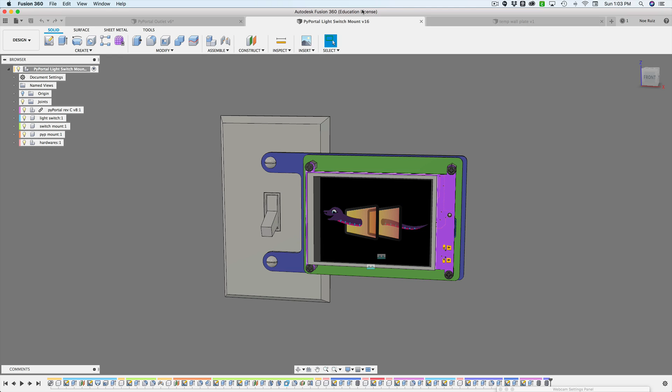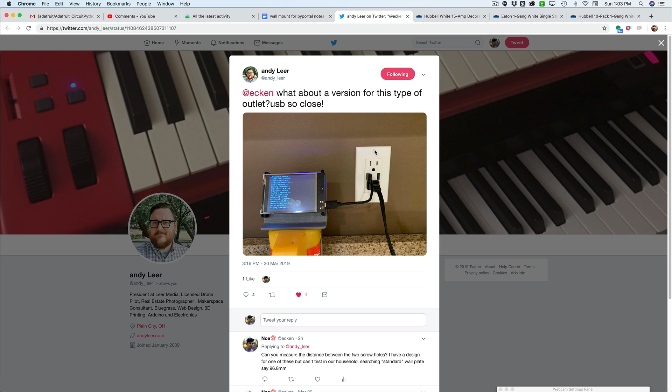In this tutorial, we're going to take a look at our PyPortal wall mount design and create a version that works with a wall outlet. So this is the light switch version, and I got a tweet from Andy Leer—thank you, sir, for sending this in. This is a great example of why we definitely want to make a design that can be either parametric or that fits this type of outlet. So let's take a look at how to do that.

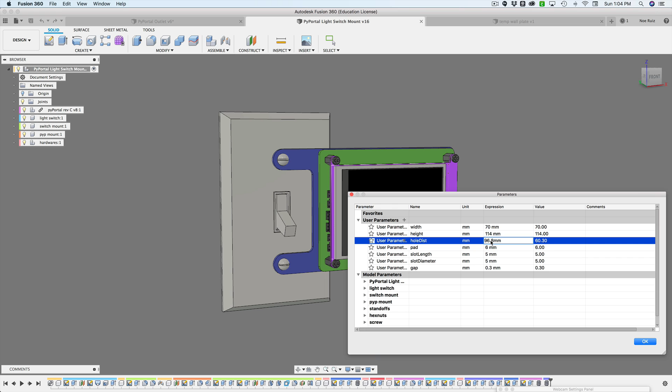Using the existing design that we have set up, ideally I really wish we could just update the dimensions, but let's take a look at what happens when we do that. I do have some user parameters set up, and I definitely recommend setting these up where they make sense. For this one, I have the hole distance here, set to 60.3 millimeters. So I did some digging on the internet and found out that most light switches, or rather outlets, have a distance of 96.8 millimeters.

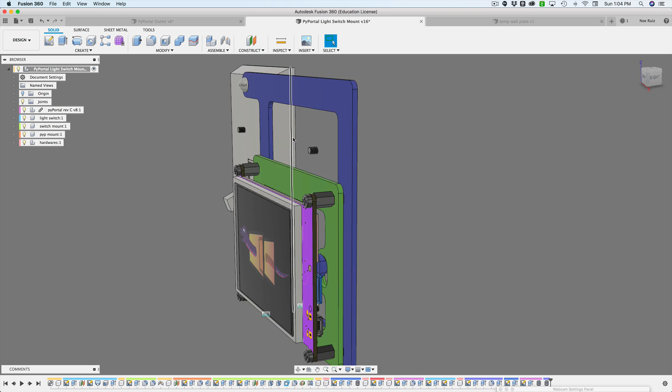So when I update that, the design will update, but we're going to run into a couple issues here. First of all, the joints that are set up for the PyPortal aren't really flowing with the design—they're not centered with the light switch anymore. You can see we have some broken geometry here in these screw threads and stuff. So we could go through each sketch and try to fix it up, but I already assessed the design and took a look at the main sketch that put this together, and there's no real good way to salvage or repurpose this design, so I'm just going to create a whole new design.

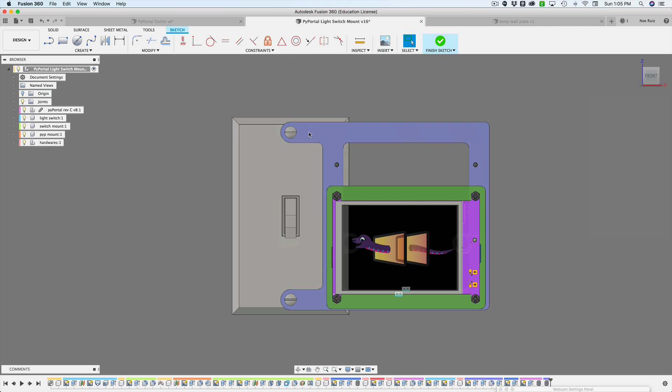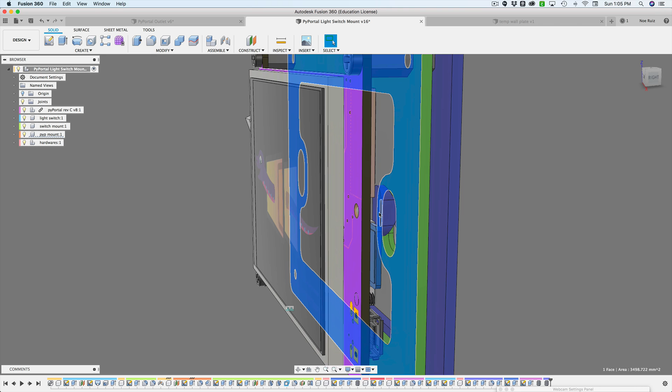But we can use a lot of the values and tolerances that we already have figured out here. For example, we already know a good set of numbers for creating these hooks, so we're actually going to make it so that our new wall plate can work with the PyPortal mount, because it's a two-part system where this guy hooks into these little pegs here. So that's what we'll do.

So let's go ahead and Control Z that, and that's the original design. We'll have this open as a reference point. I already have this created, so if we ever get lost, we can always go back to this one. But let's create a new one from scratch. So I have this empty design here, and I already have it saved.

What I'll do is start off creating a new component, and I'll name it the wall plate. I like to design where the front is the front of the thing and the top is the top of the thing, right? I really like to keep my design matched up with the view cube here. So I want to sketch on the front plane. I'll create a new sketch right up here, and I want this to be a centered base design. So I'll just create a rectangle here.

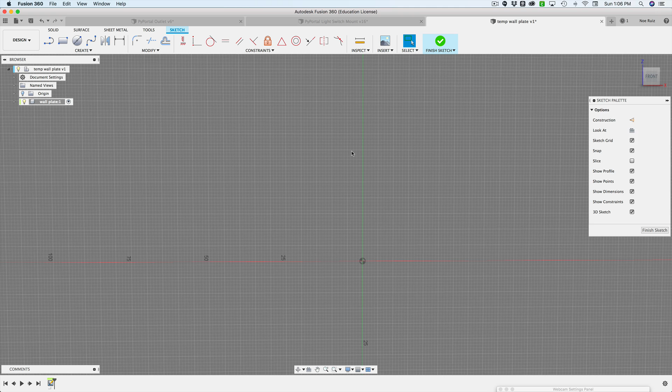I won't apply any dimensions to it yet—that way I have some degrees of freedom. What I like to do is grab this, let's say this is going to be our bottom edge, and then hold down Shift and select that center dot that's in the center of this origin, and click the midpoint constraint. That way I can move this around, and it'll always be in the center of our green line here. And then I can move this up here too if I need to.

With that, now I'm going to open up our parameters window and start setting up some user parameters. So I have plate height to do—I need a number here—and then I need a plate width.

I need to probably keep the same camel case. Let's say this is half of that, so like 54. And then I need a depth as well. Let's say plate depth.

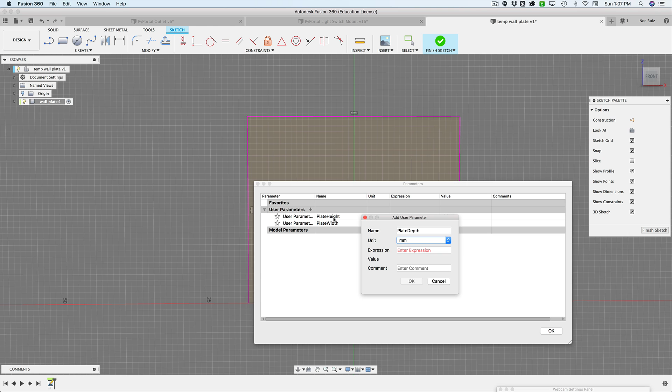Right, and then we'll say something like 4 millimeters. I'll hit OK, and I'll start applying them. So for this one, it's the height, right? Okay, and then for this one, it's going to be the width. Okay, and then the depth we'll do it a little bit later.

So now I do have some sort of reference here. Depending on whichever light fixture we have set up, we do want to take perfect measurements of that. If our spec sheet has it, we can just input those here. So for this particular light switch, we will use—or it's not a light switch, I keep calling it that—it's a wall plate. That's what they call it.

So let's use these numbers, right? So this is going to be in inches. So we can convert those over in Fusion, no problem. So for the width, oops, we got to do that in our parameter window. So for our width, let's just paste that, say inch, hit OK.

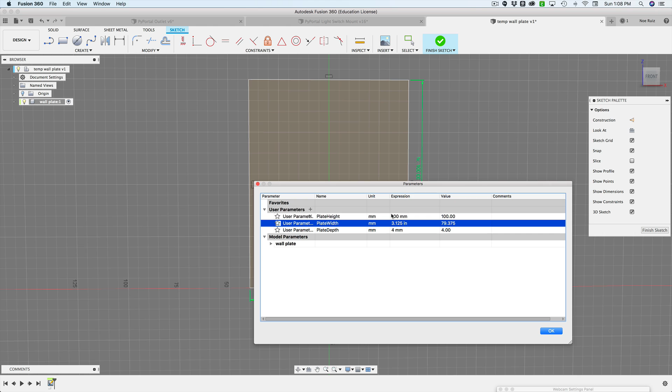And then for the height, it's going to be 4.875. So let's just put inch there, and it converts it into millimeters for us. And then the depth is 0.06, which is the depth here. Inch again, and there you go. It's like 1.5 mil. Wow, that's really thin. Okay, cool. So hit OK.

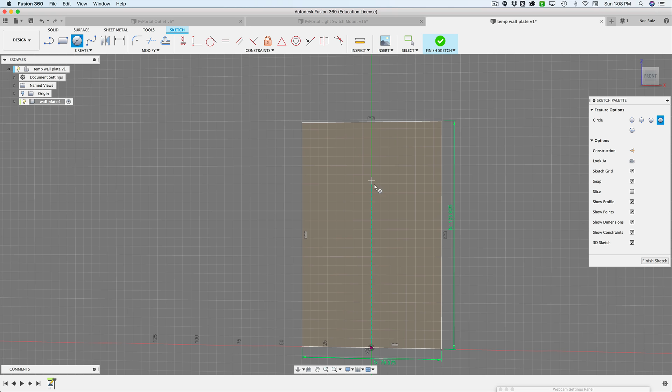So there is our setup light plate. Now we need to create those mounting holes. So over here, I need to kind of create a hole somewhere that's in the center of this. So what I'll do is, if I just roll over this right here, it kind of gives me an idea that it is in the center of that. So I'll just click one here.

It's going to be 6 millimeters, but I could also set up a parameter for that. Maybe I'll call it M hole for mounting hole, and then just type in 6 for that. And then we can go back into this and then say hole, and that'll be a hole.

Now, instead of creating 2 holes, I'm just going to mirror this one. So what I'll do is I'll grab my line tool and I'll create a construction line. If I just roll over here, it'll kind of snap to that middle there. I know it's the middle because it gives me that triangle. So I'll click on that and then get the triangle on the other side. And now I have a nice line that separates these two.

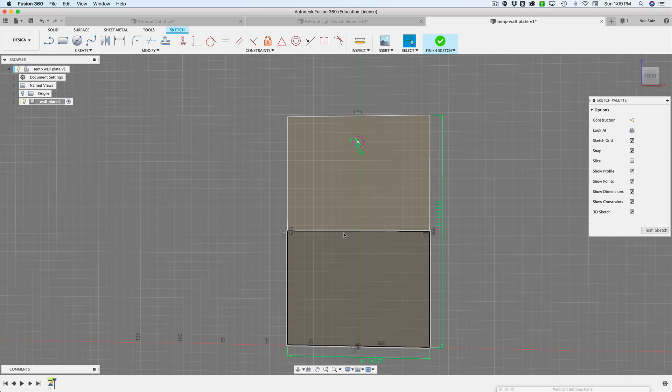It's always in the middle. And if I ever update the height of this, that will always follow and be in the middle. So I'll hit X on that to create a construction line, and now it won't intersect our profile.

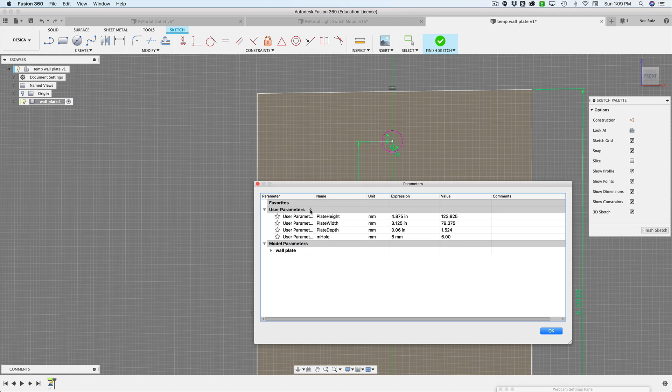And then what I'll do is I actually want to apply a dimension from this center of this hole to this edge here of the construction line. This one I need to put a number for now, so I'm just going to put 48. And what I'll do is I'll create a new parameter, and we're going to call this hole distance, hole dist, I guess, for that. And we need to know what the distance between those 2 holes are.

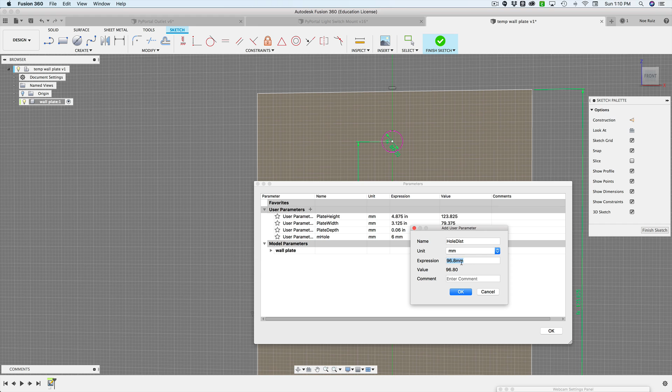I did some digging on the internet, and I did find something here. Actually, I don't believe I did, but I did write it down here, and this is the number that I found on Google Images. So this one is subject to change, of course, and if you put this millimeters to inch, it'll give you, it's like 3.81 inches. So we'll keep it that.

I'll say OK, OK. And then because we're using a mirror, I actually have to divide that by 2, which is super easy to do. So we'll say hole distance divided by 2, like that. And then it'll give me the half of that.

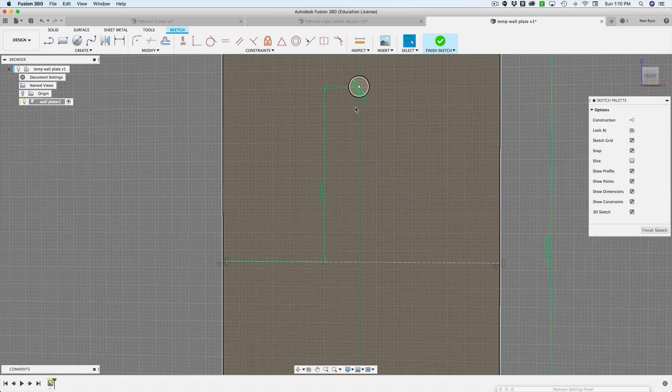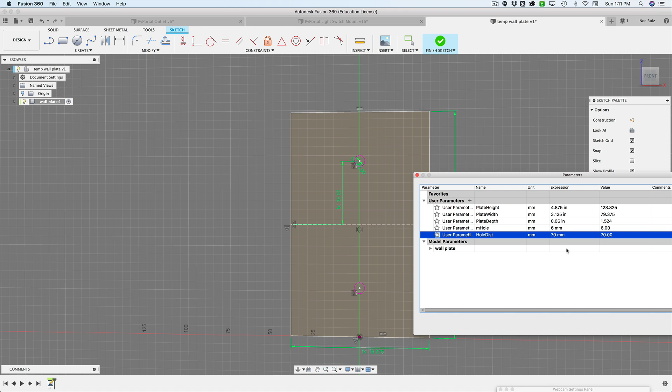So with that, now what we can do is we can create a mirror. So I'll say I want to create a mirror of that object that's already selected. My mirror line will be that construction line. And if we look down, there's a little preview of that before we hit OK. Cool. Now, so if ever our distance changes, our hole distance, the thing will update with us. So let's say we want to go down to like 70. You can see it's updating with us. Cool. And then I'll change it back to that.

Okay, cool, so now we have that. That's pretty much all the geometry we need to create this. Now there is one little issue here: if this moves this way, all of a sudden it's no longer in the center.

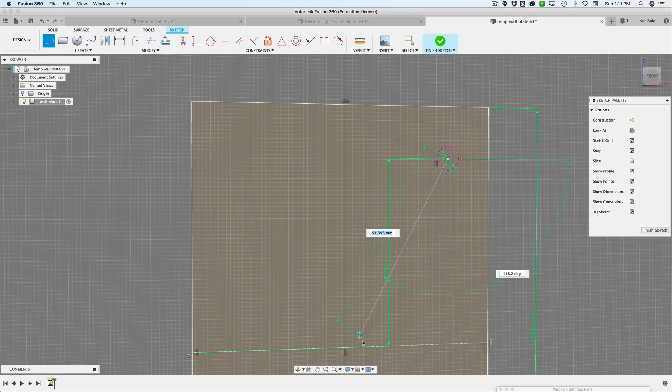So to fix that, what I can do is create another line. I want this line to be stuck to that center, and then put it in the middle of this construction line, like that. So all we have to do now is add a vertical constraint to this line, and it'll be perfectly straight up and down.

So let's do that by clicking on the horizontal/vertical button, and bam, you can see that purple color is now white, which lets me know it is locked and fully constrained, so nothing can move.

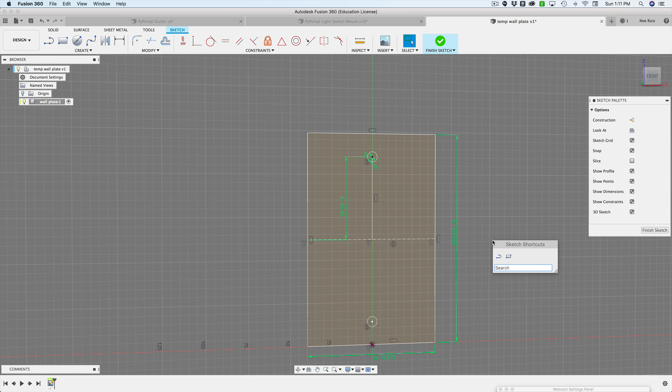Sweet, and again, if we were to update our hole dimension, the bottom will update with it. Finish sketch. Now we can extrude this out.

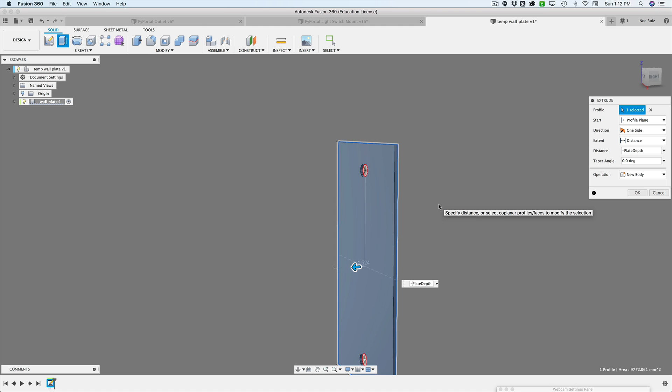Again, looking at it from the front view, I want to go this way, right? And that depth here, I can just type in depth. But you'll see that it's trying to go the other way, so I actually want to put negative depth, and that'll make it go that way, so it's facing forward. I'll hit OK.

So there is our light switch plate. I can go ahead and hide the sketch because I have that behavior turned off. Normally it turns off automatically, but I like to keep it on.

All right, so now that I have that, I actually want to bring in the PyPortal object that I have, the PCB itself. So I'll go into my parts folder and bring it in. Right-click, insert into current design.

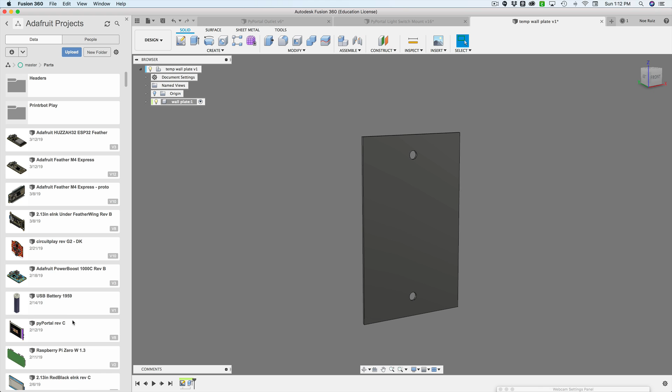If I had a bunch of different components, I would create a component and then bring it into that nested component. So for now, I'm going to just leave it as it is and hit OK.

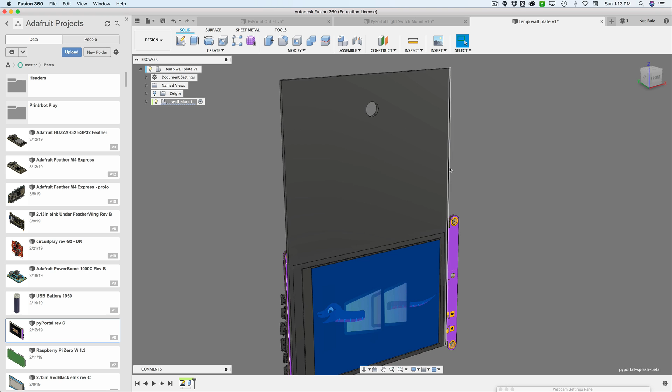At this point, what I need to do is create a joint so that it is always in the center of our light switch, because that's the way I want it to be. I always want this PCB to be in the center, or at least at the midpoint of this line here.

So let's see how we can do that with a joint. What I'll do is grab a joint tool like this, and my first component will be the edge of this guy here, and I want to make it so the little icon there is kind of flat, the way it is now.

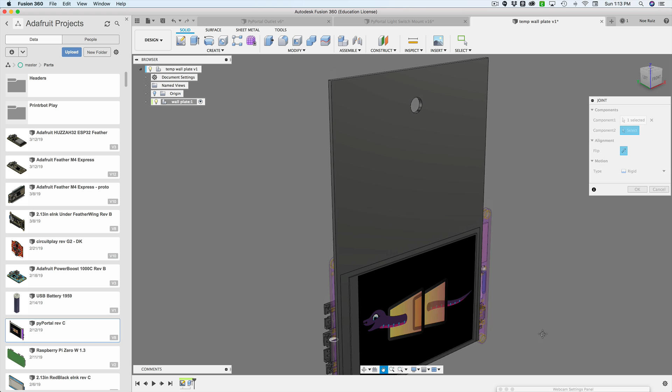So I'm going to click on that, and then scroll over this guy to get to that middle point, and you'll see that it's in the same orientation. I'll click on that, and Fusion will update and give me a kind of preview before.

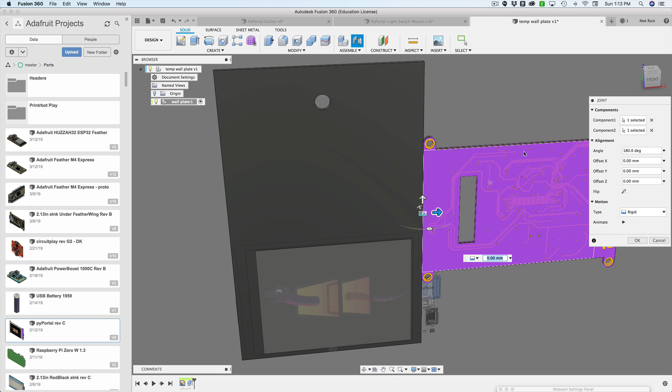Now all the components associated to the PCB haven't moved yet. Until I hit OK, it's just visually going to look like that. But at this point it is in the middle, and you can kind of create some offsets here.

So if I want this up away from the light switch plate a little bit, I can do that here, so I'm going to put -10. But for the X and the Z, I'm going to leave it alone. I'll hit OK, and when I hit OK, all those components get updated with it.

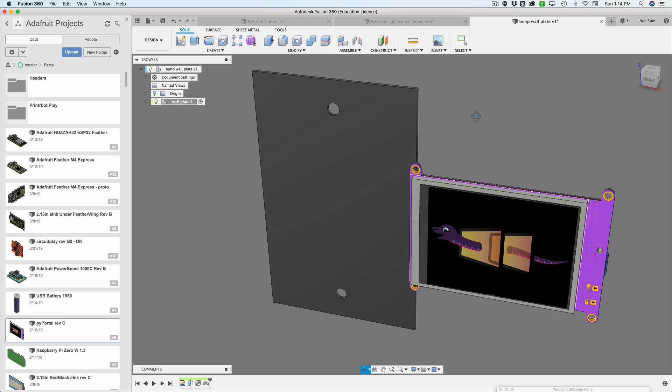And now it's floating in space there, but that's because we haven't created our mounting bracket yet. So we're going to create that next, but let's go ahead and actually test out our joint and our user parameters.

So bring up that user parameter window. Let's navigate away there, close this window, give us some more space. There we go, that's looking good.

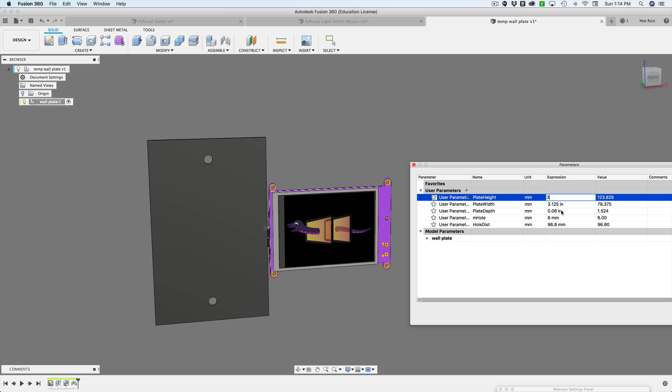So now the width, or the height really, let's play around with the height. It says 123, let's do 130 millimeters. Hit OK, and you'll see that the PyPortal is now still in the center, or still in the middle of our edge there. So that's working out really well.

So if we ever change this, we go higher, for example, that PyPortal is just going to always stay in the middle of those two mounting holes, which is what I want. Very cool.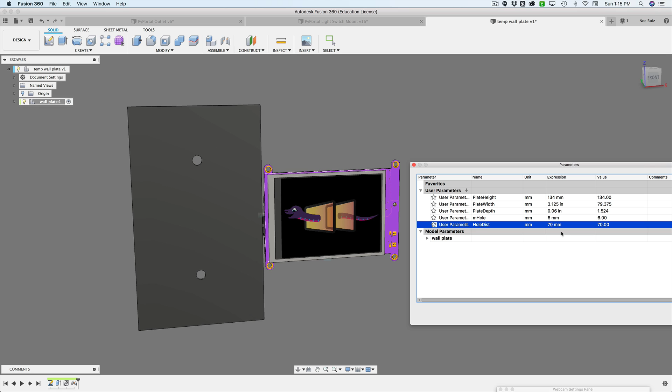You'll notice that the plate's changing, but the hole distances remain the same, which is good. That means if we change this, we want the PyPortal to stay in the middle because it's relative to the width of the plate height now. So that's the way we have it set up. We can change that back like that.

All right, cool, so it's working so far. Now we can create a new component and work around our thing here. So I'm going to go out here. It looks like I accidentally brought the component into the wall plate. That is not what I wanted to do.

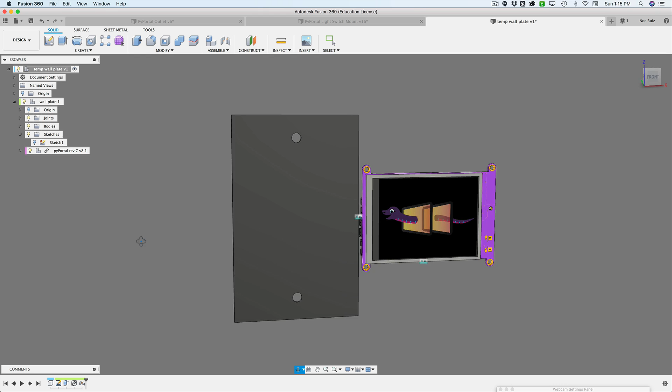Unfortunately, I can't undo that, I can't take it out. So I'm just going to leave it like that for now. That could introduce a problem, I suppose, but we'll leave it alone for now. I probably should have brought this outside in the main assembly instead of nesting it in the wall plate, because now I need to create a new component.

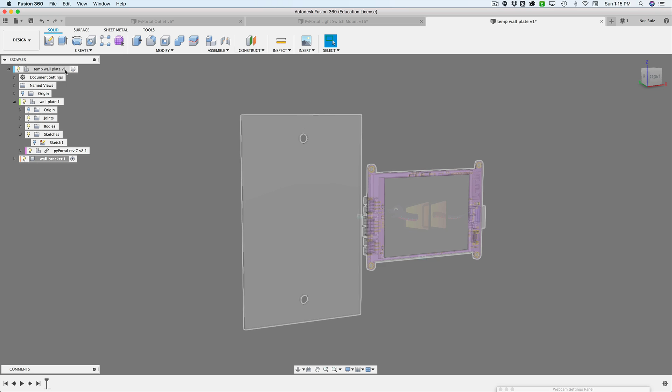So I'll create a new component. I'll call this one the wall bracket. That's what it is, and it's on the root level here. If I bring this down, you can see it's in the root level.

All right, good. So what I want to do is sketch right on top of this light switch plate. To do that, I'll select the surface and then hit the Create Sketch button.

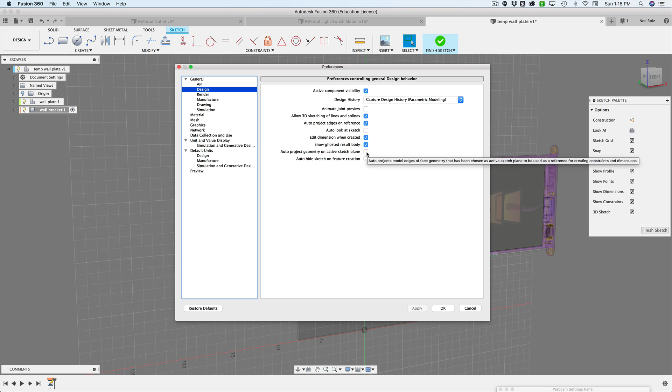On some machines, or some installations of Fusion, you might get a projection already here. But the way I have it set up in my user preferences, if you go up to your name, then Preferences, then down to Design, you'll see there's an Auto Project Geometry on Active Sketch Plane option. I have that turned off. If you have it turned on, you'll probably already have all those geometries projected in automatically.

I do not, however, because I don't like to do that a lot. I just want to bring in a couple things, like this mounting hole here. So I'll just hit the letter P, which is a hotkey for project.

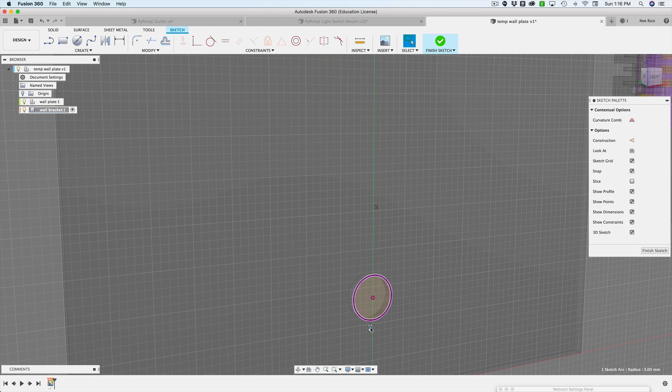I'll come up here and grab this one as well, so now it says I have two selected. I'll hit OK, and now I have them in there, and they're purple, indeed linked to the light switch because of that little icon, letting me know it's a projection. If I ever wanted to break the link, I could just delete that icon, but I'm going to leave it on there because I want it to always update. So if we were to change the hole distance, those would follow that, which is good.

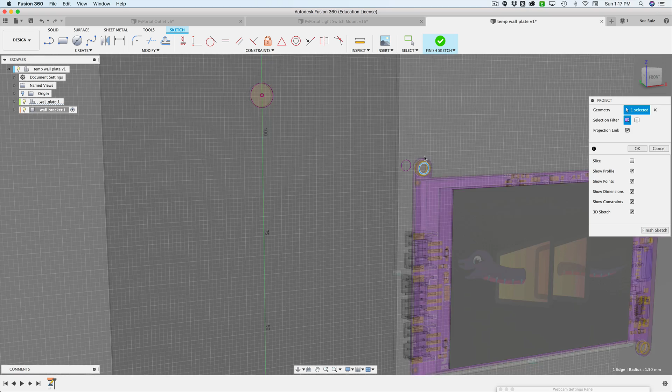The next thing I'm going to do is project in the mounting holes from the PyPortal itself, bringing in those four mounting holes like this. I'll use the hotkey P again to quickly bring up that projection dialog, then hit OK. You want to make sure the projection link is actually clicked on. You can have that turned off, and if you do, they will not be linked, meaning they won't update when something moves.

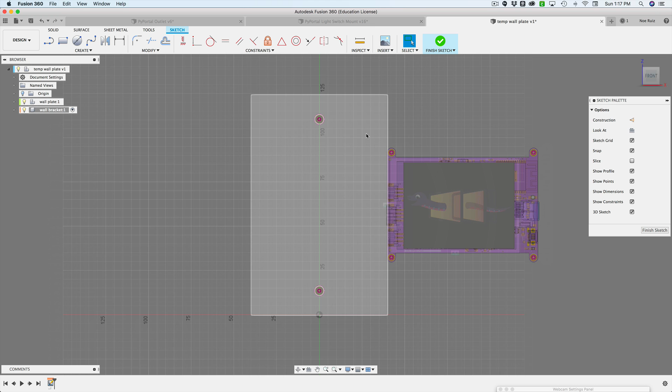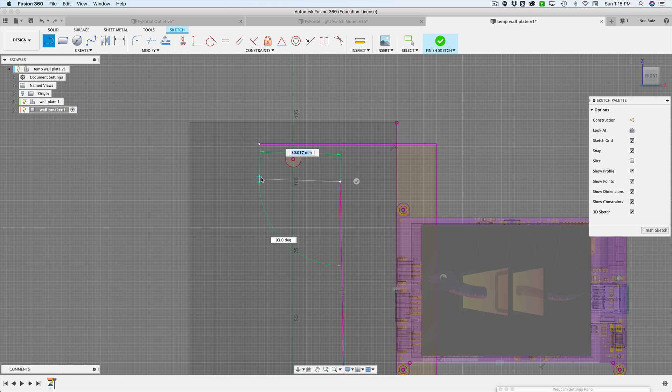So I'll hit OK, and now I need to start drawing out my geometry for the bracket. I'll start with the line tool, and I'm going to freehand this out, just clicking on the general idea of where I want this to go. I kind of want this to come out here, like this, coming over those mounting tabs. Click in here, kind of do this bunny ear situation. Then come up here, do here, and close it off right there, and that closes it.

Now, there are definitely some things we need to fix here.

Some of these edges are not straight. So for example, this one, I'll go ahead and straighten that out, and then straighten up any of the ones that are kind of, I'm not sure if they're straight or not. But that looks good.

The next thing I want to do is make these mounting tab bunny ears a distance away from the mounting hole here. I'll round these off to like 6, and do that for just about every edge that is close to that circle here. So as you can see as I'm drawing it, these 3 edges are 6 millimeters away from that mounting hole.

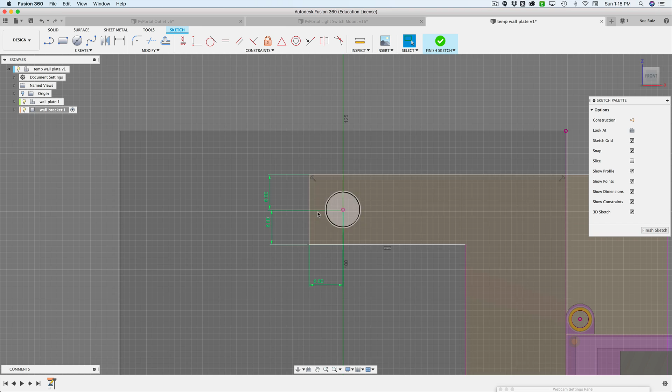I'm going to repeat the process for the bottom here as well, using our line distance tool. And if we wanted to, we could create a user parameter to set this up, but I plan to have the same distance around that mounting hole. So now I have 6 over there.

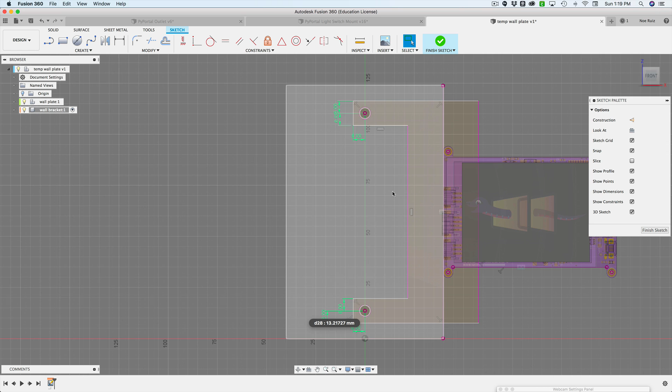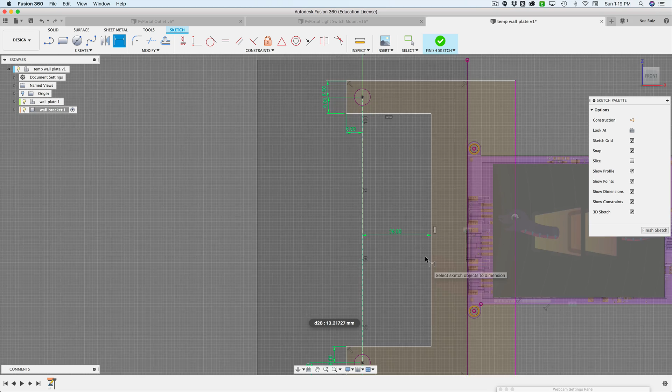The next thing I want to do is create some distance away from the center of this axis here, this line. So I need to create another construction line that will connect these 2 mounting holes together. I need to make that line into a construction line so that it won't intersect anything. Now I can apply a dimension for a distance between that and this center here. I believe I'll use something like 26. There we go, okay cool.

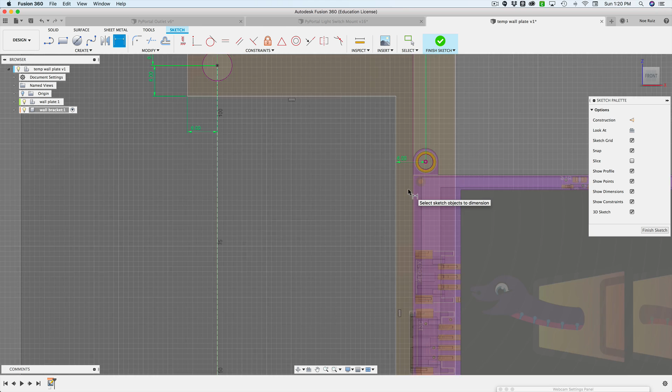So now with that, I want to create some distance from this area to this mounting tab on the PyPortal itself. I'll make it 6 as well. We could probably get this number here a little bit closer, so maybe I can delete that and say I want 6 millimeters away from here. I think that's better. There we go. That way it's always 6 millimeters away from any number of edges here.

So now I have this area here. I could probably delete this. Wait, yeah, I don't need it. So I deleted that auto-projected thing there, it was an edge I didn't need.

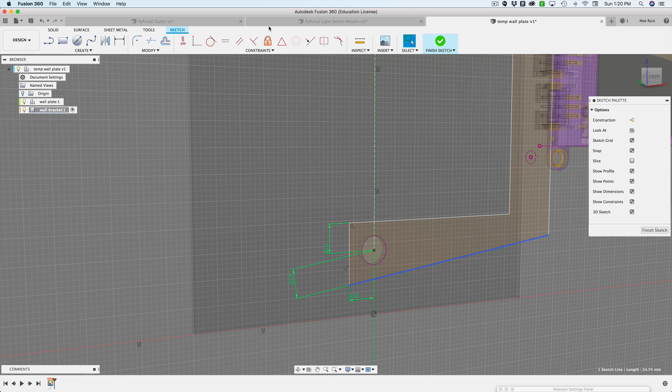What is this? What is this? Oh, I see, yeah, that needs a horizontal constraint there. Apply it like that, and that should lock in our shape. So that is kind of the shape.

Let's go ahead and do a little quick test with it while I'm in here editing the sketch. So if I change the hole distances, where is it here? Hole distance - if I change that number to a lower number, yeah, it updates with it. All that square geometry is updating with it.

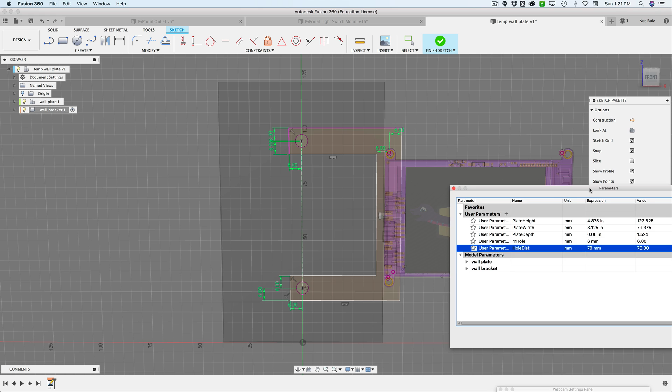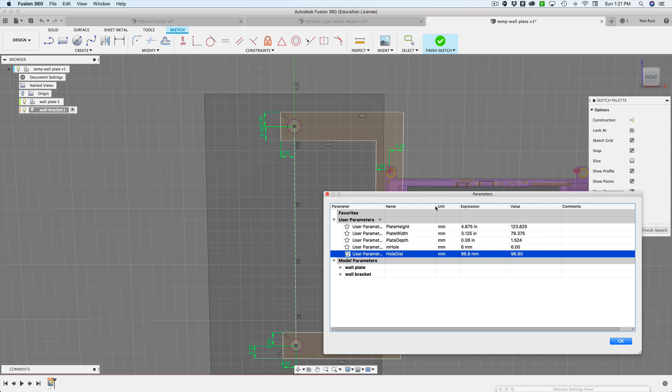There is a problem though, it looks like. This is still not, yeah, that needs a horizontal constraint. There it goes, now it's working better. I really recommend doing that, checking your work before actually extruding any of the profiles, that way we can catch something that would break later in our design. So I'll bring back that value to 96.8, and it looks like everything is still locked in place, which looks good. So there you go, that is working out.

So the next shape I need to create is something that's going to encompass the mounting tabs on the PyPortal. I'll grab my line tool again, and click around here, kind of freeform this, to create this shape. It's going to encompass the mounting tabs. Let's go ahead and straighten out our lines with some horizontal constraints.

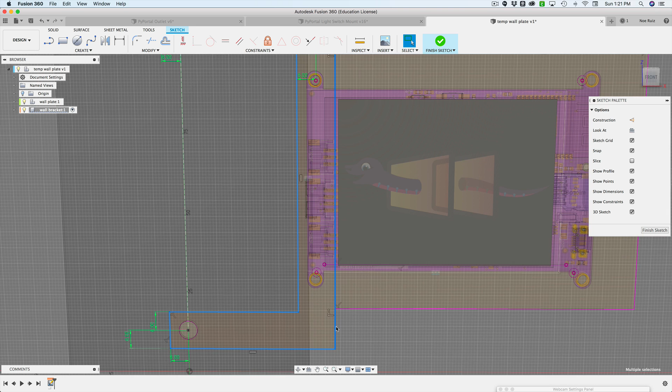That's pretty much it. I can't apply one here because it's perpendicular with something that's already horizontally constrained. Now I need to add some sketch dimensions to lock this down. So again, I'm getting some lines I don't need, like this one - don't need that. I do need those holes though, so let's use them now. I'll say I want this edge to be 6 millimeters away from that hole there, so I got 6, and then we'll do this side over here, same hole, 6. There we go.

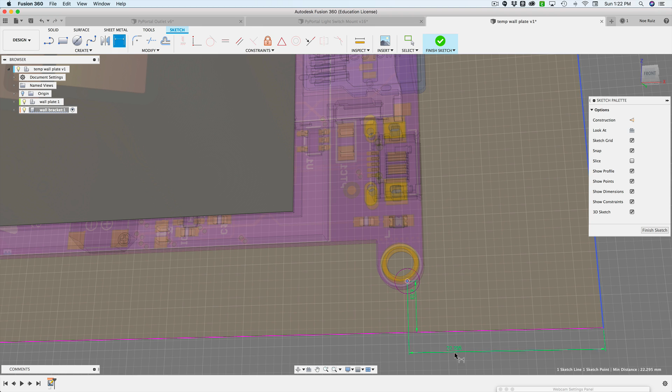That's looking constrained, but this is not looking constrained. It looks like that doesn't even have a horizontal constraint, so let's apply one. There we go. And then the last edge here needs to be constrained, again, 6 millimeters away from our mounting tab. There we go, all right, that's pretty good.

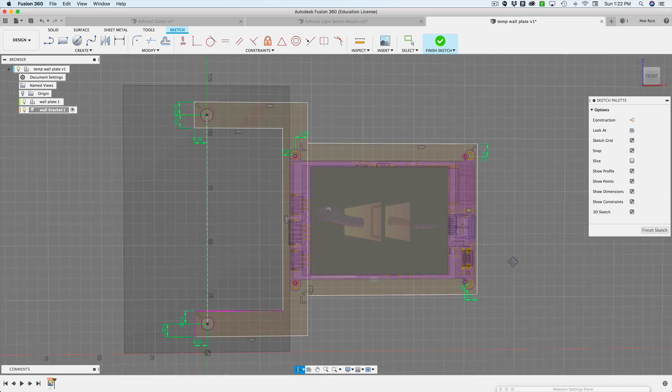So what I did in the other design is I created a cut opening in here, because to create this would be a lot of material we don't need. We need to expose some of these things, especially for that reset button we'll have access to. So I'll hide that geometry just so I can create this. I'll use my line tool and create that same shape we have on the outside of it.

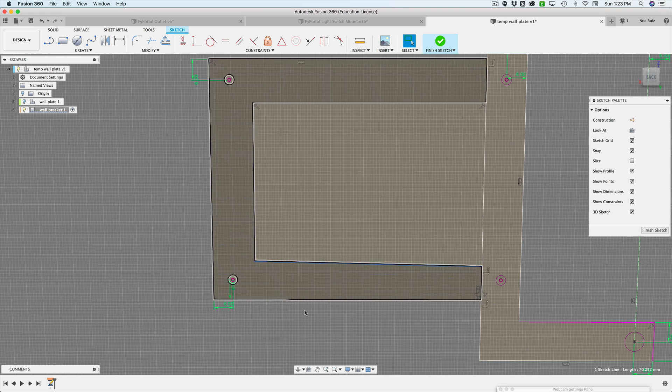And I'm not using an offset because I think this will give us a little more flexibility than the offset. So again, I need to straighten up these lines wherever it makes sense. If I do it too much, it'll say hey, you can't do that, it's already constrained.

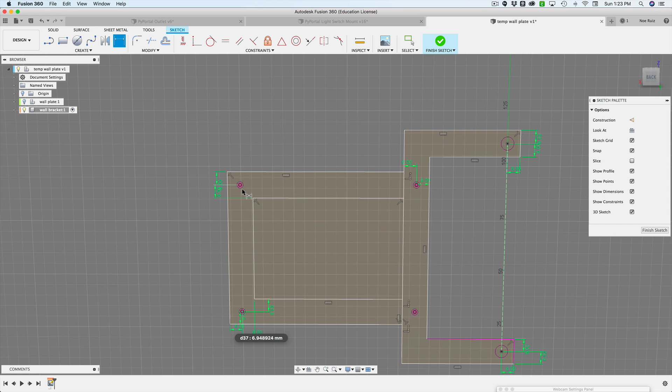Okay, so then I'll do some more sketch dimensions on these edges here. Let's lock them in place using the same value, 6, why not. And then this is the last one from this hole, 6 right there. You could have used this hole, but I'm using that hole there. All right, so now we have something that we can extrude.

Looks like something broke here. Yeah, it looks like it doesn't have a horizontal constraint. There we go, see, things get introduced as you sketch to it. So now we have a fully locked design, and we have these 2 profiles that we can select and extrude.

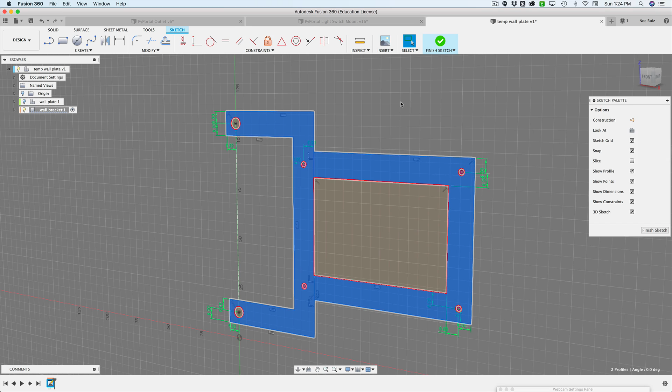Let's go ahead and do that. With them selected, I'll hit E on my keyboard, that brings up the extrude command really quick. And then I can say 2 - I can make that a parametric value, but I don't think I need to. So there is our main shape for this design.

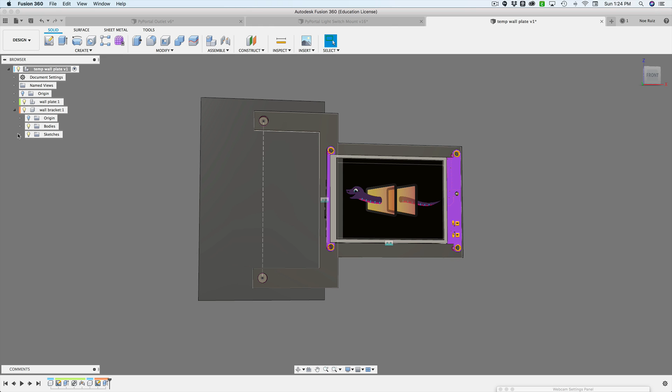So let's bring up our objects again, our wall plate and our PyPortal. If we do an active component to the main assembly, we can see it here. Let me open that and hide that sketch for now. There we go, and we can bring up our materials profile. Let's bring in some color here so we can get an idea of what's what. So there's our light switch and there's our bracket.

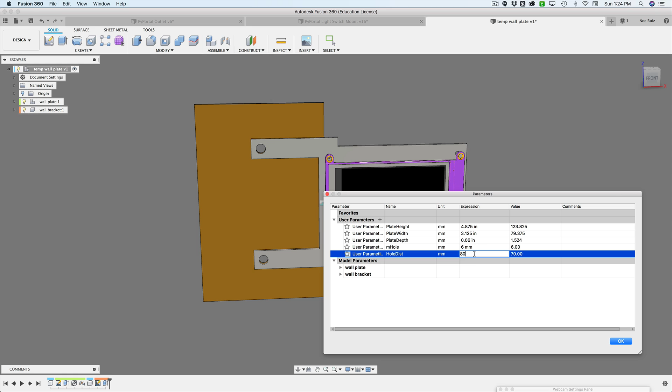At this point, we can play around with the user parameters. Let's say I want to go 80 - you can see that's working pretty good. And 90, and then back to 96.8 - yeah, that's working out pretty good.

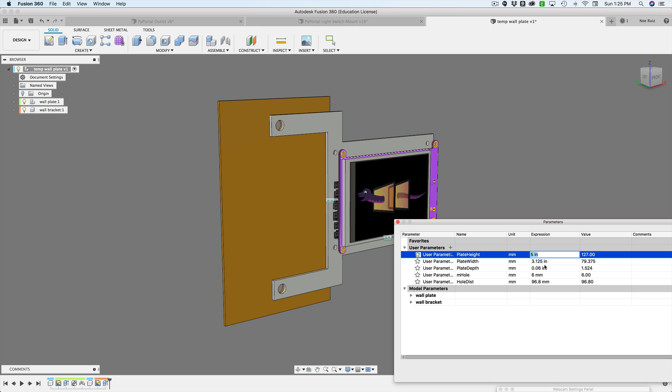Nothing's breaking. And if we were to update the height of the plate, let's say we want 5 inches, you can see it's growing there. The bracket's the same, most likely, because the hole hasn't changed, but the joint is being driven by this height, so it's just moving up there, but it's still the same geometry for the bracket, which is pretty cool. Let's go back down to 4.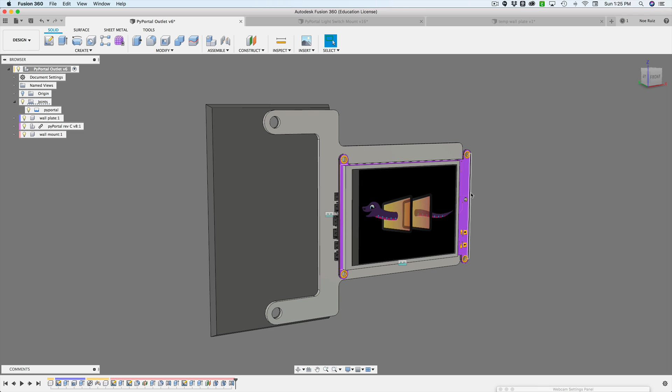All right, so that's probably going to do it for this tutorial. I think as we keep plugging away at different geometries, we would make something that looks like this, where we bring in some slots to create the pegs to create this geometry. We could probably do that for another tutorial, but for now I just wanted to create the main structure to make it so this can be updated for these type of outlets. So I think that's going to work.